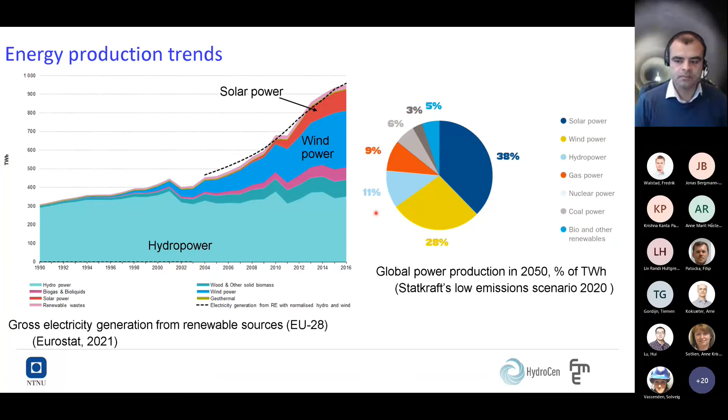That means we need certain flexibility in the system for whatever inflexibility is created by intermittent sources, to create a balance between production and consumption. There are various sources competing to provide that flexibility, and it's needed at different time scales - for example, short time scales within an hour, within a day, within a week, or within a month or years, like a baseload plant.

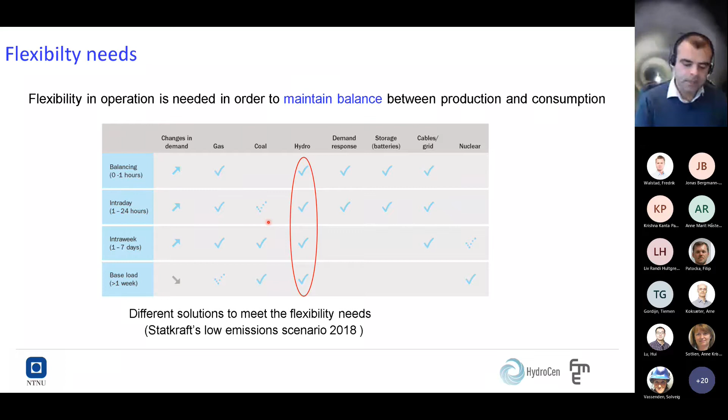That brings us to the main topic of how the hydropower plant is being operated today and how that will be operated in the future. Since there is going to be some difference in production and consumption, that will also create differences in power prices during the day and during the seasons.

To take benefit from that multiple power prices, the load in the power plant has to be changed frequently, meaning the power plant has to be operated at different capacities throughout the day or the week, or at different time scales. Such an operation is called hydro peaking in general terms.

As I said earlier, this is called hydro peaking, and that has actually been in effect in Norway since 1991, when the power market was deregulated to create a more competitive market. As I mentioned earlier, there was not a lot of contribution of wind and sun, or intermittent sources, in the 1990s, but still the practice of hydro peaking started back then to create room for a more competitive market.

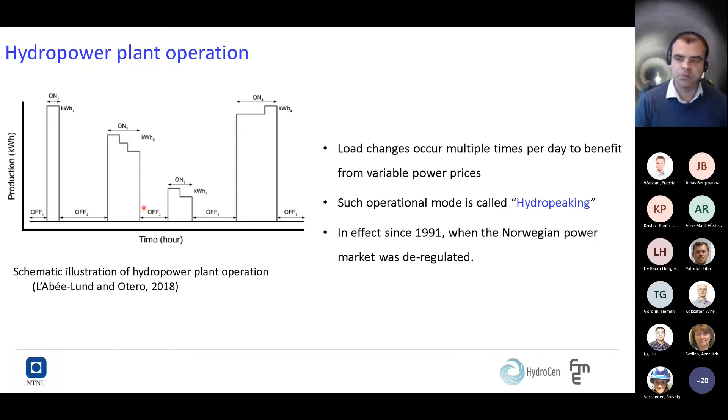The power plants we've taken here have different modes of operation. For example, Roskrepp and Driva have some operational restrictions to hydro peaking because of environmental reasons. Duge is a pump storage plant, and all the other plants have no restrictions against any kind of operation.

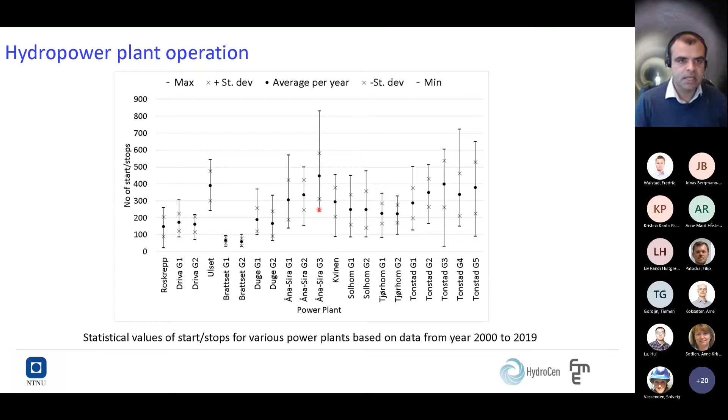That's probably why the operation is governed by the peaking of the pumping operation. But other than that, all the other power plants have more than 1,000 load changes every year of varying degrees, as you can see. So these two graphs show how the power plants are being operated in Norway until now, as a result of both the energy market and partly because of the inclusion of intermittent energy over the years.

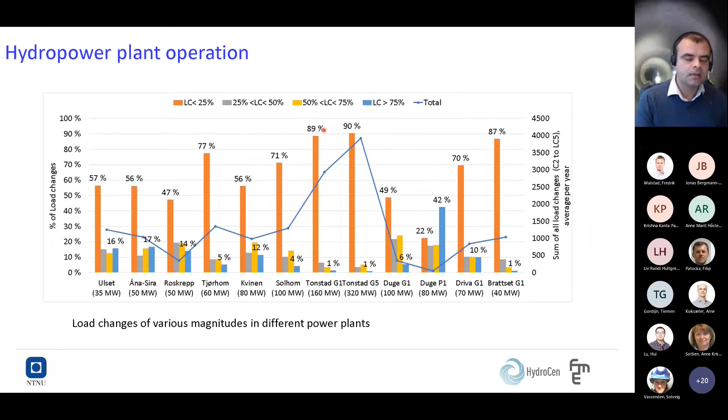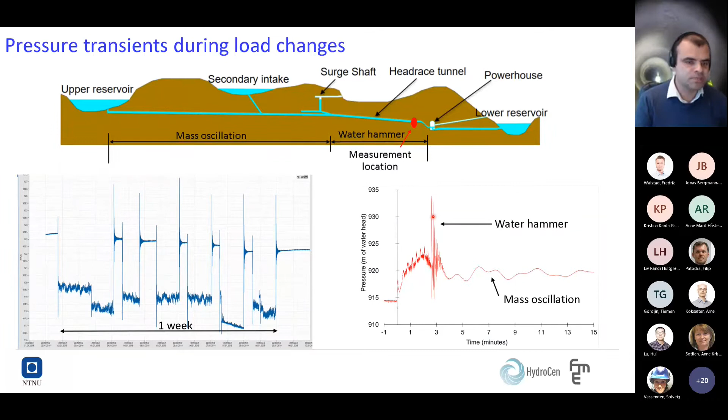That's why the time period of application of this hydraulic stress because of water hammer is very small. That's why we don't need any factor of safety for design. That is the gist of the design criteria that we use. So the design criteria basically covers the factor of safety against hydraulic jacking, but it doesn't say anything about the safety against the effect of frequent load changes that are occurring, at least now. But in the past, there have been at least some minor discussions about what will happen if there will be frequent pressure pulsations in the future.

I'd like to read this line that says: if the operational requirements lead to frequent pressure pulsations, special force efforts may be needed to ensure that blocky unlined sections remain stable, operational over the lifetime of the project. So maybe there's some hint that this will happen in the future and that might create some problems.

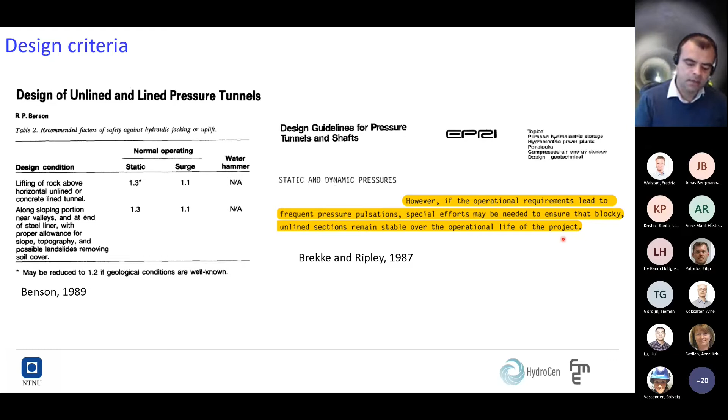So it says that if there are some frequent pressure pulsations, that might create some problems in the future. But based on my study over these years, I have not come across any other literature that specifically studies this particular issue in detail. And that is what we have done in this study. I will, from the next slide, try to explain what we have done.

On the left figure here, you see an example of what a tunnel looks like and the water pressure acting on a tunnel with some flow occurring through the joints. When the water pressure in the tunnel is in static condition, it will induce some flow through the joints and some pressurization in the joints, which will reduce the effective stresses in the joints. That will cause some minor flow out of the tunnel. As per the design criteria, if that does not cause any hydraulic jacking and the leakage is within acceptable limits, then we accept the design and go further with operation of the power plant.

But when the pressure changes here during a pressure transient, something changes around the rock mass. For example, the pore pressure in these joints close to the tunnel changes, and that creates some additional forces on the joints, which we think might be the source of some instabilities like these that we've seen when we visited some of the tunnels during this study. For example, we can see some blockfalls here and here as well.

We will try to link, or try to explain, what happens when we induce a pressure transient, based on some measurements that we've done in Roskrepp again. That is the content of my next slide.

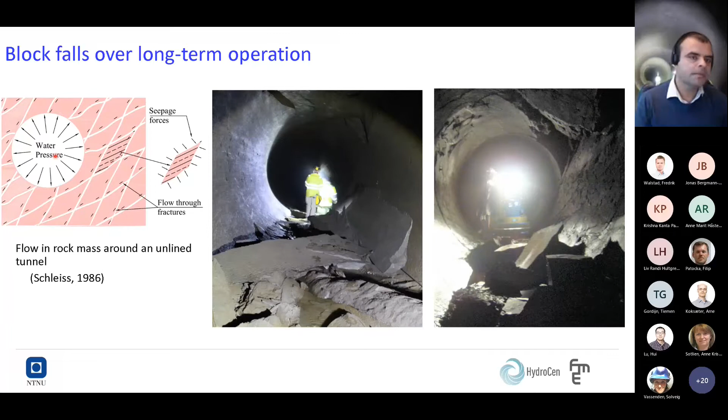This is a plan view and a detailed view of an instrumentation program that we've installed in Roskrepp in June 2018. This instrument is still recording the pressures from the tunnel and the rock mass. The basic gist here is to record the rock mass pore pressure when the power plant is being operated.

If you look at this figure, we have an unlined section of the tunnel here until this point, and here begins the steel lined section of that tunnel. That's the direction of flow. That's an access tunnel coming into the headrace tunnel with a concrete plug and a steel gate. What we've done is drilled 5 boreholes in different directions, and installed a combination of packer and steel pipes to record the pore pressure in the rock. We brought these pipes out of the headrace tunnel to a dry area outside the steel gate, and installed pressure sensors and a data logger to record the data.

Before that, I'd like to explain the figure on the right. These are the orientations of each borehole that intersects a particular joint set, as perpendicular as possible. If you see the red section, that is the section behind the packer and is grouted. And the blue section is collecting the water from the rock mass that has traveled from the joint. So this pressure measured by the sensor will record the rock mass pore pressure for all cases.

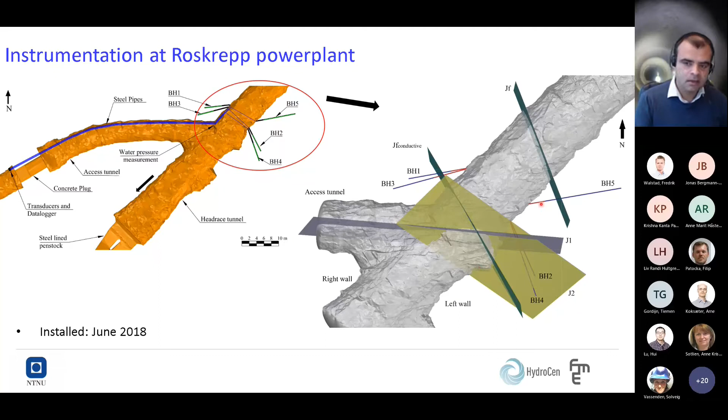Some more detailed figures of the same arrangement. That's how the tunnel looks. These are the 5 boreholes that we've drilled and installed the packer in. And that's how it looks from the outside. The packer is inside, of course, and a pipe is coming out, going to the dry area, as I mentioned. We've also simultaneously measured the water pressure at the tunnel at the same location.

So a cross section of what is happening inside the borehole: the section that collects water, the packer, and the grouted section. What the packer and grouted section does is create a barrier between the tunnel water pressure and the rock mass pore pressure, so there is no direct hydraulic connection between the tunnel and the rock mass. The water pressure goes out through the pipe toward the dry area, where it is connected to a pressure sensor like that.

That pressure sensor measures the pressure values from the rock mass and is recorded by the data logger. Here you can see the pressure sensor and the data logger. This data logger measures pressure readings at a rate of 10 readings every second, and it has been measuring data for more than 3 years now.

The further results from this instrumentation are the main focus of the results and findings that I'm explaining today.

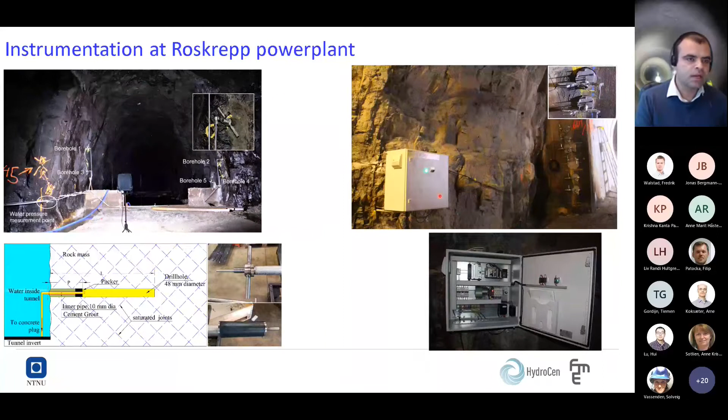This is what the result looks like. I've chosen to present the data from the pressure readings from the tunnel pressure, and the readings from 3 different boreholes. The blue line is the tunnel pressure during the pressure transient, showing the mass oscillation peak and the water hammer peak, along with the pore pressure readings from somewhere down in the rock for the 3 boreholes.

Borehole number 1 is what I like to call a responsive borehole, because it responds very well to the pressure transient in the tunnel. It actually follows quite well with the tunnel pressure.

Borehole number 2 is what I call a non-responsive borehole because it doesn't respond to the pressure transient at all. Borehole number 4 is also a responsive borehole, but it has a certain time lag, because the tunnel pressure peak is here and the rock mass pressure peak is here. So there's a time lag between these two pressure peaks, and the pressure magnitude is reduced, probably because of friction.

The reason these boreholes act as responsive or non-responsive is the properties of the joint. For borehole 1 and 4, our joint mapping before installing this equipment showed that they are partly open and open joints with some conductivity. Borehole 2's joints are tight and do not conduct any water, which is why they do not respond to the pressure transients.

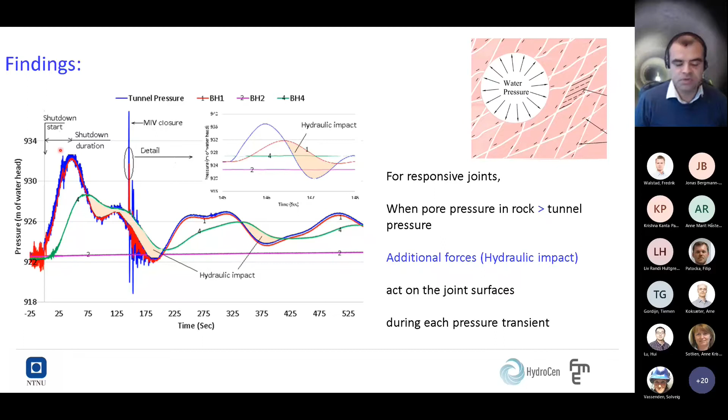I will explain what happens when we have different shutdown durations in the next graph. Here I present two pressure transients of similar magnitude but with different shutdown durations. This is a larger time period of these two transient events, lasting for more than 1,000 seconds, and you can see they have different nature of graphs, different shutdown durations, which I will explain using this graph.

So the graph on the right side is just an expansion of this particular section of the graph here.

So if you look at this particular graph here, the duration for the final shutdown, meaning the location of peak water hammer pressures, are almost the same. The peak for the red and the blue water hammer peaks are almost the same.

But we see that the nature of the pressure pulse is different here. As you can see in the blue line, it is a bit steeper and acts more rapidly. As compared to the red line, it is a bit more gradual, with a series of events occurring that make it more gradual.

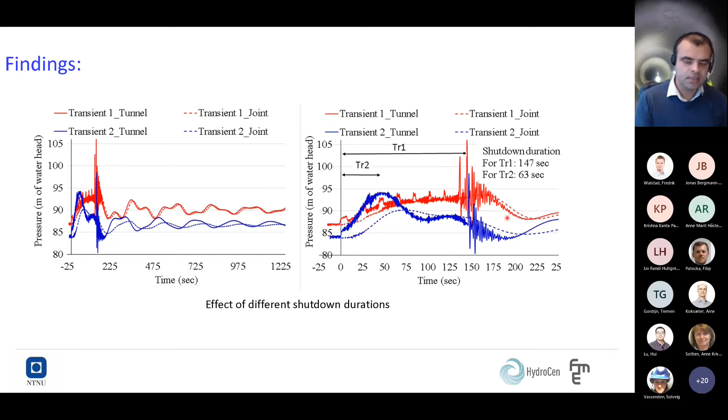For transient 1, the shutdown duration is long, almost 150 seconds. So the point is, when we close the turbine valves very fast, we create a larger hydraulic stress or impact in the rock mass. That is one of the major findings that we have. And this is a comparison of two transient events.

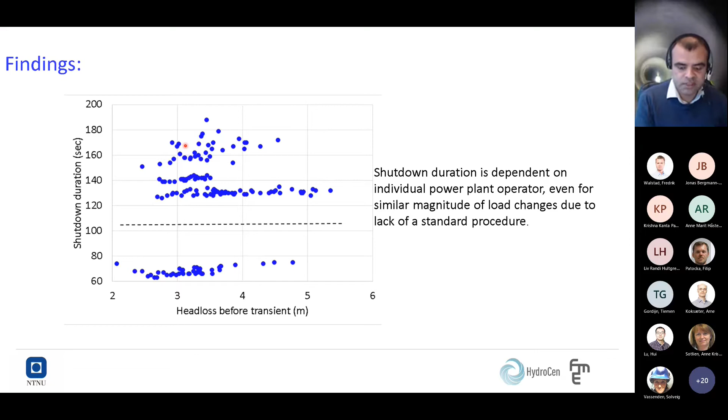If we compare the results of all these shutdowns, for example, when we do a shutdown duration slower, we create smaller hydraulic impact as compared to when we do shutdowns with smaller shutdown duration. So here, for smaller shutdown durations ranging from 50 to 75 seconds, the hydraulic impact created in the rock mass is of a larger range as compared to the shutdowns with larger shutdown durations, where we have smaller hydraulic impact.

And we see that when the shutdown duration is doubled, the hydraulic impact was as high as 10 times less in the rock mass. So the main gist of these findings is that if we do slower shutdowns and openings, we will reduce the additional loading of the rock mass and most likely slow down the fatigue of the rock mass that occurs because of these power plants over many load changes done over, let's say, 30 or 50 years of operation of the power plant.

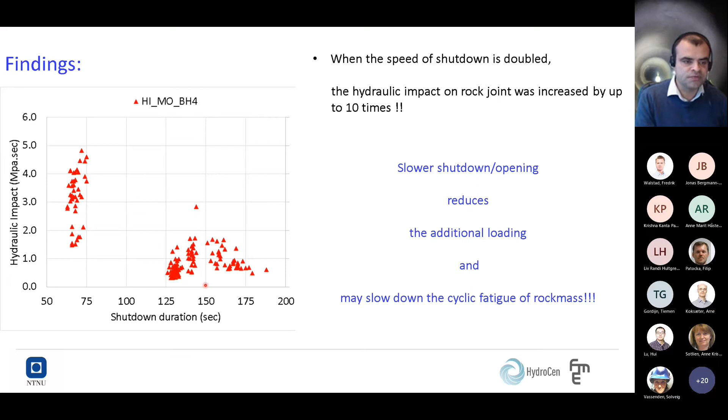This is what we have recorded from Roskrepp, a summary of results from about 2 years of operation and data. We've done numerical simulations using the same data, validated the numerical model using the measured data, and tried different things with the model to see what happens when we change some input parameters.

Here you see a block of rock mass with a joint indicated by two different colors, and a tunnel crossing that joint in cross section. We simulated the joint pore pressure measured in the rock mass when we change something in the tunnel, the normal displacement of the joint, and flow through the rock joint, for example when we do tunnel filling or induce a transient in the tunnel.

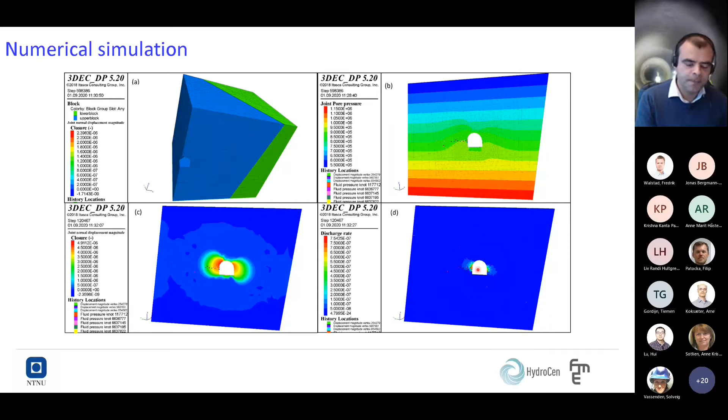We've done numerical simulations for different input parameters. For example, what happens when we change the static head of the tunnel? What happens when we change the time period of oscillation? What happens during a water hammer, and what happens during a mass oscillation? We also looked at the effect of various rock mass properties. I will only explain a part of these results.

The simulation steps are something we usually do in real practice: we excavate the tunnel and we fill the tunnel. We did the same in the model to simulate the filling, so that we can induce some joint deformation before inducing the transient itself as a result of tunnel filling. Then finally, we induce a tunnel pulse to simulate a pressure transient.

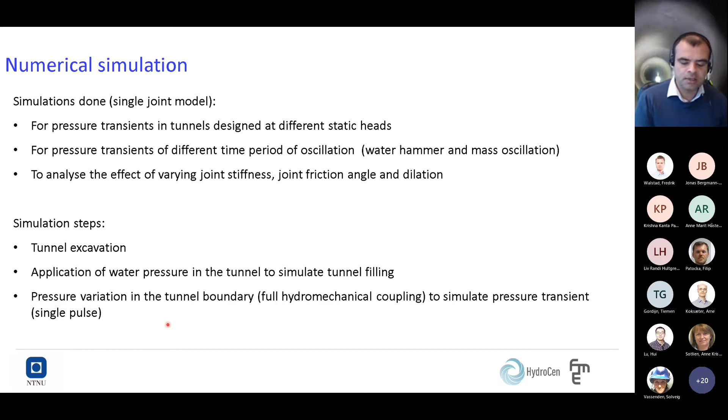So this is a result of a pressure transient induced in the model. The blue line, the topmost line, indicates the tunnel pressure we've induced, and all the other lines show the rock mass pore pressure at different locations along the tunnel wall as we go deeper into the wall—for example, 1 meter, 1.4, 2.3, and so on. These dots indicate different points along that tunnel wall.

The results show that when we are closer to the tunnel wall, the pressure magnitude is higher, with a certain time lag. As we go further into the rock mass, the pressure magnitude decreases, but the time lag keeps increasing. That translates to some hydraulic impact at each location, because hydraulic impact, as I already explained, is the area between each of these curves. For example, between this red curve and the blue curve, the hydraulic impact is that area, and it changes at every other point along the graph.

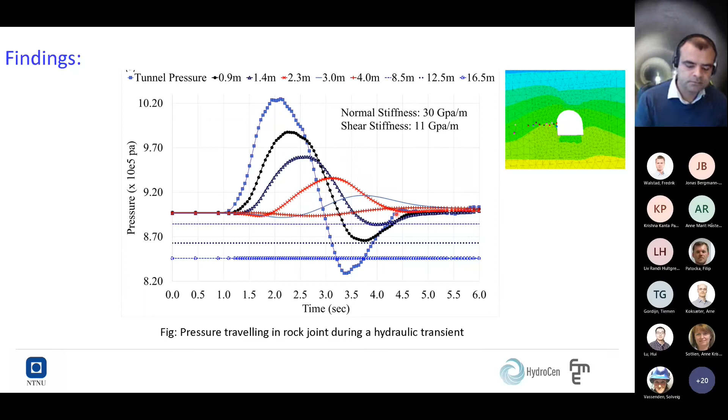For this particular result, we used a time period of 3.5 seconds—the transient starts here and ends here, so it has a time period of around 3.5 seconds, meaning we simulated a water hammer pulse. I've simulated pressure pulses with different time periods. This one is the same as I showed, 3.5 seconds, and I've used different time periods as well: 60, 120, 200, and others.

The results show the hydraulic impact at one particular location, I think at 2.3 meters in the joint, along the length of the joint. We see that the hydraulic impact, or the additional hydraulic stress created with a water hammer—the blue line—is much smaller compared to the hydraulic impact or stress created using mass oscillation, for example at 200 seconds, which is very high compared to the water hammer case.

This is reasonable because the time of application of this hydraulic stress is much larger—the mass oscillation effect, or the effect of water hammer, will remain in the rock mass for a larger time. In other words, the pore pressure will be trapped in the rock mass for a longer time.

But if you look at the graph on the right side, we see that the deformation is not that different. For example, even though the deformation values along the joint are almost similar for the mass oscillations, and also probably for the water hammer as well, the hydraulic impact is quite large actually.

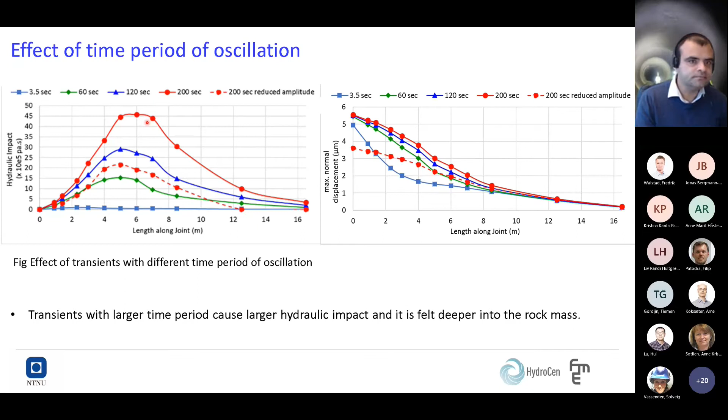As a result of all these measurement results and simulations, and based on observations we've done of some tunnels during this period, we have developed a sort of model to explain how fatigue develops in a rock mass, which could potentially lead to a blockfall, for example.

Here I've shown a situation in a tunnel where there's a set of joints, for example two sets of joints, and I've chosen some locations around that intact rock piece or around that joint to show the pressure situation when a pressure transient occurs, and what happens to the resultant pressure or the direction of the block along the pressure transient.

As we can see here, this particular situation of joints doesn't readily create a situation for blockfall, because we have an intact rock bridge, so to say, that stops this piece of rock from falling down into the tunnel. So this is still stable and might be left unsupported, for example.

So what happens when we induce a pressure transient like what we just saw in the previous slides? Again, tunnel pressure is given by the green line, and all the other lines are rock mass pore pressures at different locations.

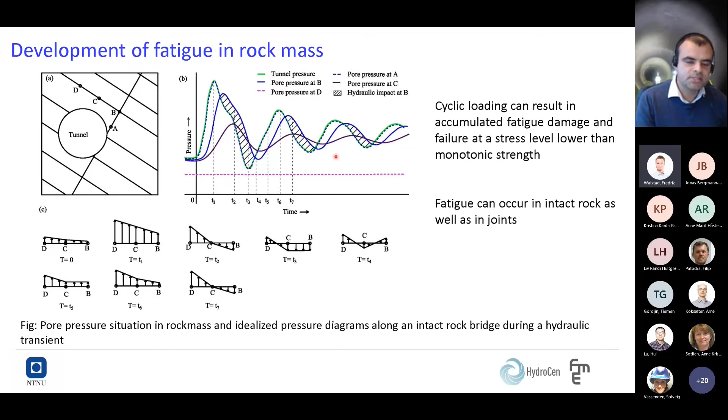Yes, quickly going on to the contributing factors—of course, the orientation of joints and the type of block that we can create with these joints will be of significance.

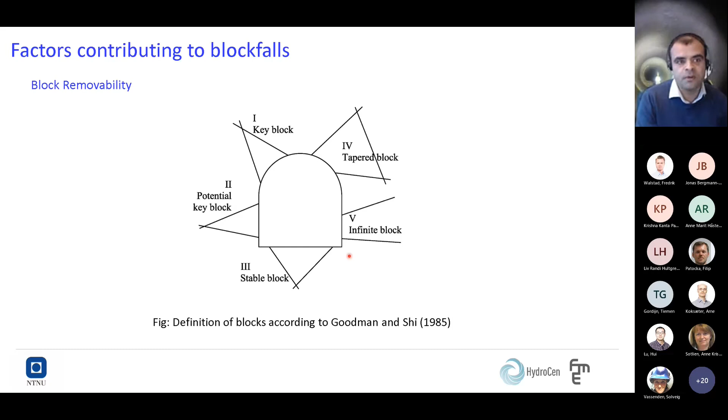These blocks will probably already be identified during the construction phase and will be stabilized. But some types of blocks, for example type 4 and 5, will not be stabilized because this is not probably a potential threat of block fall during the construction phase itself. But as we've seen from the previous slide, fatigue can create a situation where this creates an additional joint in the rock and a potential block fall. So that's one of the contributing factors.

Again, joint void geometry. Tight joints will not conduct water and not create hydraulic impact, as for example in the upper photo here. Open joints or partly open joints like these, based on the roughness and aperture, will create a situation where water travels into the rock mass and creates some hydraulic impact.

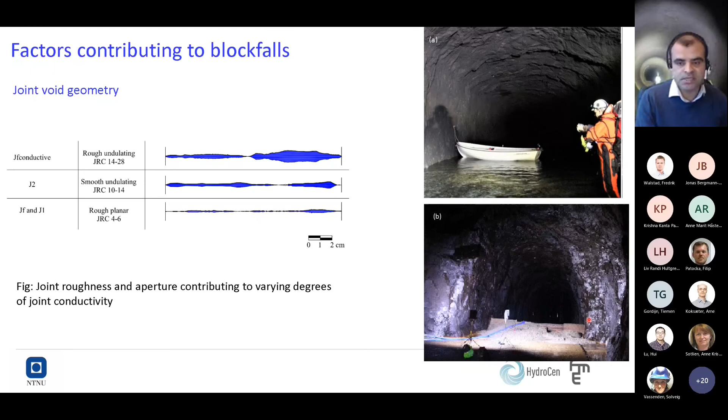Again, the deformational response of the rock mass, how stiff the rock is, will affect the block fall. Stiff rock will have smaller deformation compared to weaker rocks. Here we see that the deformation is much higher when the stiffness of the rock material is lower. The deformation is quite high, and that is also very natural.

We've seen that the hydraulic impact also travels deeper into the rock mass when the rock mass is weaker. As you can see here, for the stiff rock mass, the hydraulic impact has traveled, at least the peak, around 6 meters. But when the rock mass is less stiff or weaker, the hydraulic impact has traveled much deeper into the rock mass. So the type of rock mass will also affect the results.

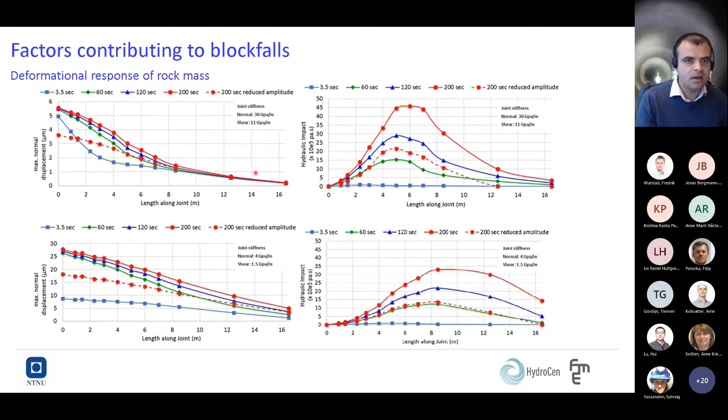And of course, the power plant operation will affect the results. Power plants without any restrictions against hydro peaking will have many stops and many load changes every year, and this will probably increase as we have more wind and sun in the system. As I've already explained, shorter durations will cause large hydraulic stresses, and tunnel dewaterings will also cause large hydraulic stresses and may initiate or trigger some fatigue in the rock mass, as we've seen during dewaterings.

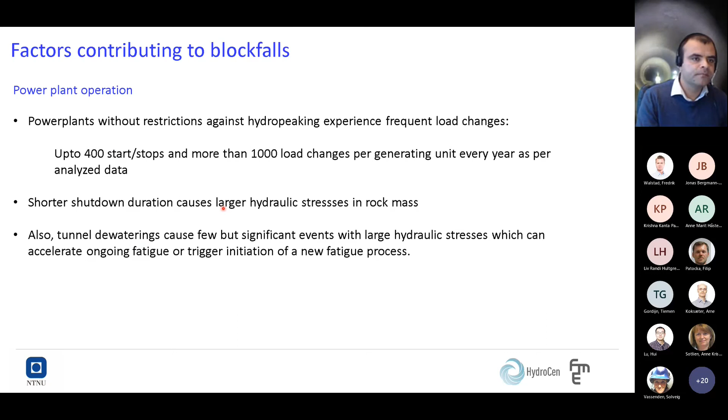These are the factors, and until this point I have explained how the fatigue mechanism develops, how the power plants are being operated, and how that affects the rock mass during each and every transient event. I think this is the summary of my results which I've done until now, and I'd like to talk a little bit about the applications of the results I've just explained.

The most readily applicable result is that we could probably slow down the shutdown or opening of a power plant without doing a lot of changes in the powerhouse, because it's just a behavioral change. We just have to be more aware that we need to slow down the shutdown so that we induce smaller stresses in the rock mass, because it's probably thought that this is not going to affect it that much. But when we do the shutdown slowly without making major changes in the power plant, it's just a matter of changing the behavior of how we operate our power plants. I think that's a very readily usable application.

For example, if we go on to assess a potential block fall situation in a dewatered tunnel or a new tunnel, the results can be used for at least a qualitative assessment of the rock mass situation. For example, what kind of rock mass is there? Is it hard rock or relatively weaker rock mass? Are there open joints, or non-conductive joints? The point is, if we have weaker rock mass with partly or fully open conductive joints, then we have to be more careful with the support recommendations. We may have to be more conservative in stabilizing our blocks or future blocks, because we might create some new joints by damaging the intact rock bridge, as I've already explained.